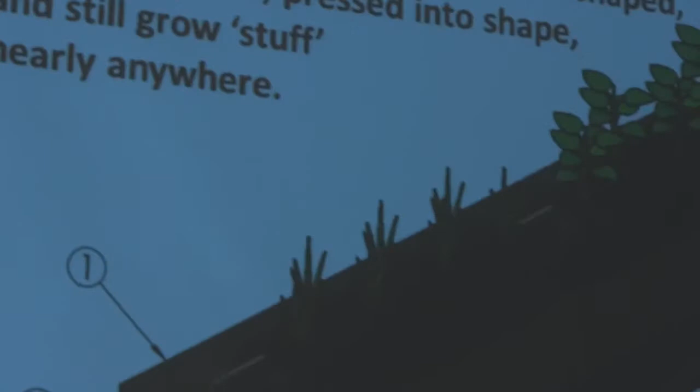This is the first flexible planter that can be shaped, kicked, prodded, pressed into shape, and still grow stuff nearly anywhere. And I mean anywhere, as long as there's sunshine and water and you have a good growing media, composted growing media. So these are some examples and designs, but that's what it looks like.

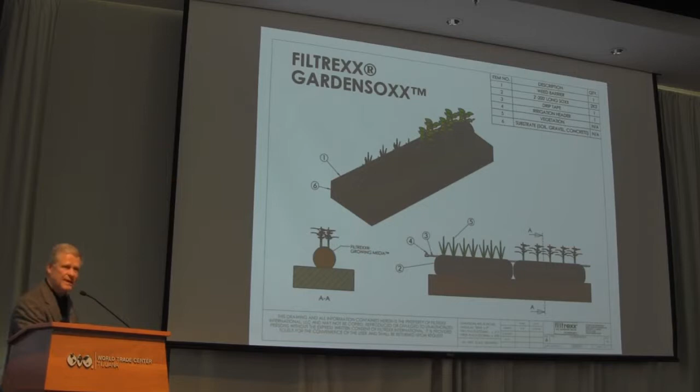It's just a sock, but it's a tighter weave sock that we fill with finer compost, half-inch minus compost, and we fill the GardenSoxx with it and plant right in the composted material. We don't add additional soil to it. We are growing truly in half-inch minus compost.

Anyone can do it. This is the garden girl out of Cleveland, Ohio. If you go online, you can Google her name, the garden girl, and she has videos of her setting up urban gardens with these socks. So here's the sock. It's simply a containment system, but it has some unique properties.

We take the growing media, like you have here in Tijuana, and the major advantages are we can set up a garden in socks within 30 minutes, a half hour, very quick. No tools are needed. There are no weeds because you kill the weeds when you composted the material. If you compost correctly, you destroy weed seeds and you destroy pathogens, organisms that will kill the plant. So we control those through composting, put it in the sock, and it lowers the maintenance required.

You use locally produced compost. Like I said, we are not a compost producer. If you're going to do garden socks in Tijuana, you use Tijuana compost, not compost from somewhere else. You reduce disease, and believe it or not, the handicapped and elderly have access, and we'll show you some examples of how easy it is for them, as well as children.

So here's some examples of sock right here, just laying it out. And here's a pallet. We usually put about 2 to 3 feet because compost is pretty heavy. So if you make it bigger than that, it's hard to carry. So you don't want it to be difficult to carry, so you make them smaller. And we stack them. So here they are in a wheelbarrow.

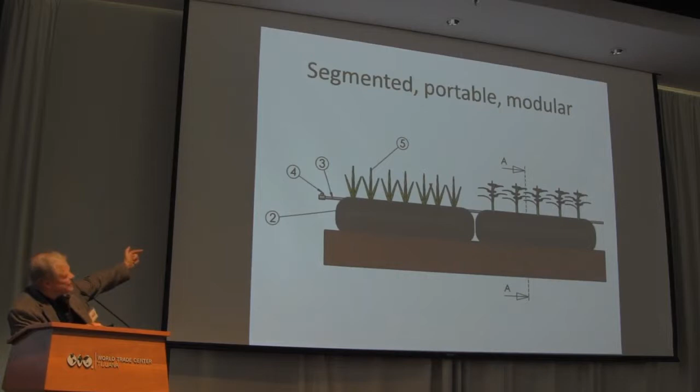I said they're segmented, and you can see the drip tape right to the top. We can put drip tape in there and set it up on a timer, and it'll get irrigated on a little timer, just a source of water. So here it is in a greenhouse or a hoop house structure.

Here's some more, see the drip tape right there? There's the drip tapes there. Here's some more examples of layouts in hoop houses for organic production. Here's direct seeded lettuce.

Food safety and quality. Just that fabric with the strawberries, they can't get any disease organism on because they're laying right on the fabric to actually stay cleaner. So it's easier to keep your produce clean.

Commercial growers. Here's 14 acres that were planted, 250,000 linear feet of garden sock, or 70 truckloads into a production system here. This was back in the eastern United States. We're just starting to introduce it into California.

I'm working with the former Secretary of Agriculture in Orange County, just north of San Diego, A.G. Kawamura, Orange County Produce, and we are going to be planting organic farms on top of the tarmac, the concrete runways from the old El Toro Marine Air Station. So we're going to take land that was not being used for anything and grow organic vegetables on it. Best food you get.

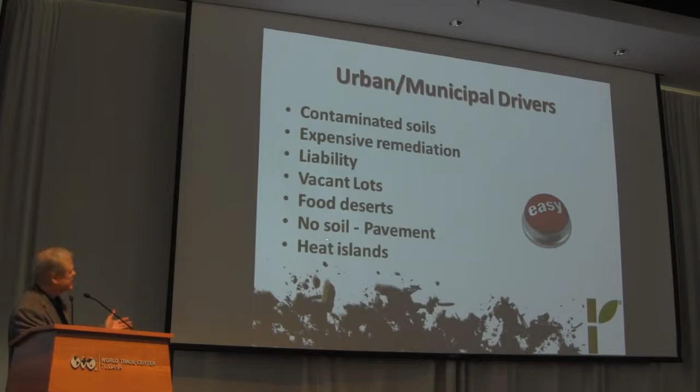Vacant lots, food deserts, places where there just isn't available food - you can grow it there. No soil needed, grow right on the pavement. And heat islands - by growing on pavement, you actually cool the entire environment.

Here's an example of urban gardeners coping with contamination. These are some of the contaminants you will find in urban environments that you have to deal with. We provide an easy fix for that - we can separate, put plastic on top of that contaminated soil and grow a garden right on top of it.

So here's an example. This is a typical building cleared for a community garden. And typically, if it does not work, it is too much work, meaning people just give up and stop gardening. You've got to keep it easy. This soil is bad quality, it did not work, so people will typically just give up on gardening and say it's too much work.

So you can lay it right here. This guy just laid it right on his grass lawn and watered it with a watering can.

Here's different communities working together, putting in community gardens. We have the Filtrexx Foundation that does nonprofit work with communities, low-income communities, to help them establish community gardens to feed people that are in need of assistance with their food bill. Here's a Somali Bantu community in Syracuse, New York, and they just put in traditional rows in that case. But this is what a typical garden would look like with the different crops.

And here's the big point - it's easy. That's what we want, we want easy. Local food, the triple play: it's locally produced, it's safer, you know where it comes from, it's organic, and it's more nutritional. USDA showed food grown in the Filtrexx system had 40 to 50% more food value than in conventional soils. Why? The organic matter feeds that plant much more effectively than just any soil that we've just dug up.

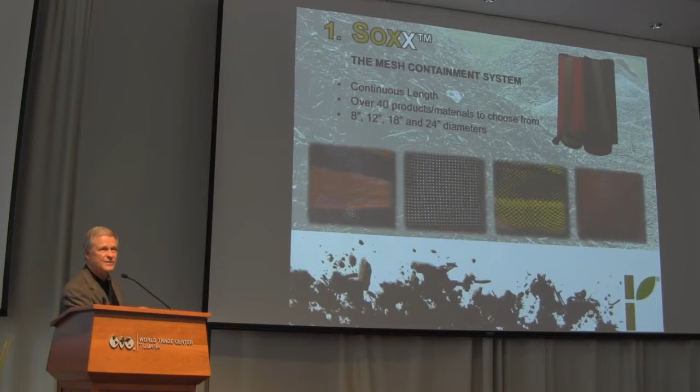It's all natural, very good at filtering polluted water, just like nature, and highly reliable. And now you can stay compliant with all the regulations. So these are some of the organizations that support the use of compost for stormwater pollution control.

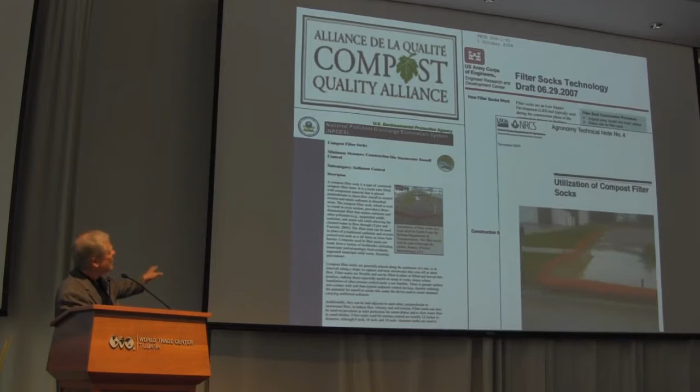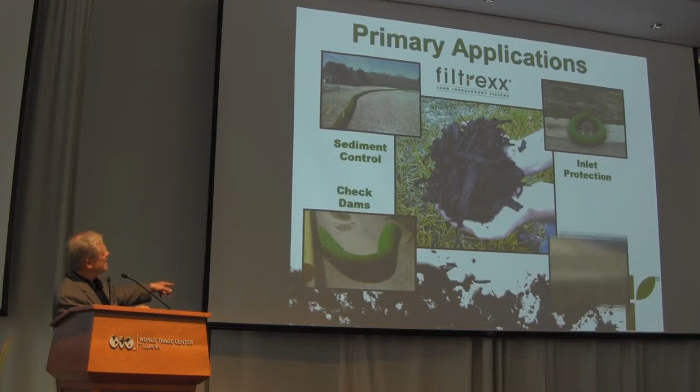The primary applications of this filter media, the compost, are perimeter control for sediment, inlet protection, check dams, and slope interruption for slowing the water down as it comes down the slope.

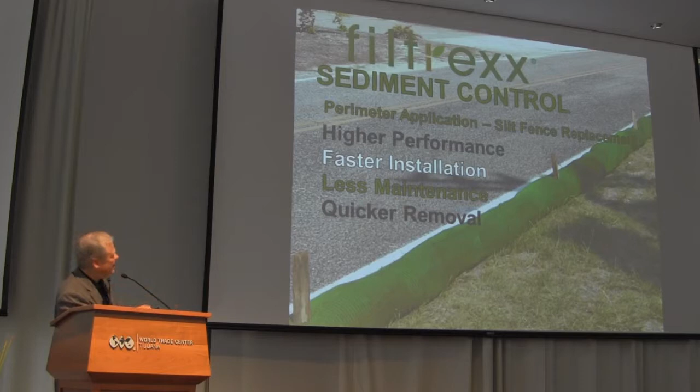So here's the sediment control for perimeter. This is what you'll see, the green sock in California. Higher performance, faster installation, less maintenance, and quicker removal than silt fence. Here's another example of it.

Here are surface applications. Notice this is on asphalt. You can do it on soil, concrete, asphalt, grass, tree, and root zones. It's so heavy that it just flattens out and filters that water without the water running underneath it, which is what will happen with a lighter product.

Here it is, high flow rate. In this case, you want the water to go there, but you want the contaminants to stay outside. You do not want to block that inlet. That inlet was put there for a reason, to get the water off the street or the parking lot.

If you block it with like a straw wattle, what will happen is you'll create flooding out here. Now what do you have? You have a more dangerous situation of hydroplaning and cars getting out of control. So you want the water there, and the sediment and contaminants on the outside. The mulch filter sock allows the water to go where it wants to and keeps the contaminant in the sock.

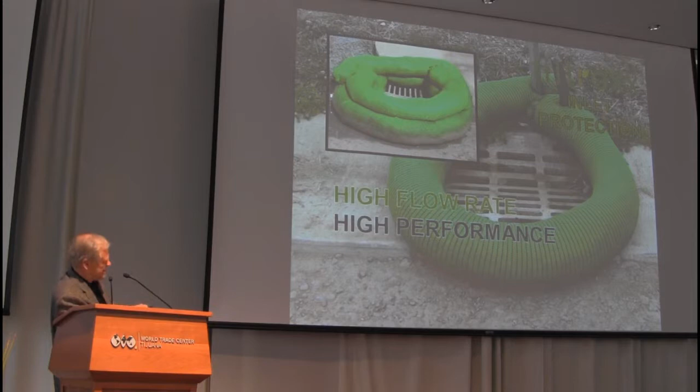Here's double stacking to get more capacity. You can see the sediment right there. Here's another one, over too.

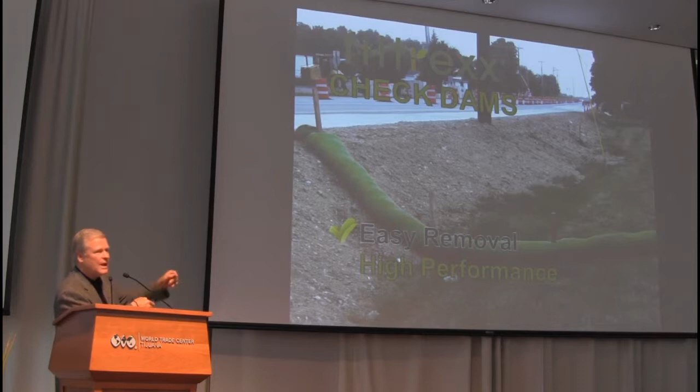Here it is as a check dam to filter the water as it goes down the channel. It's easy removal. You can just cut the sock and spread the landscape mulch after you're done, and dispose of the sock. Or you can go with a biodegradable cotton sock and use that, leave it there, and let it decompose. And it's high performance.

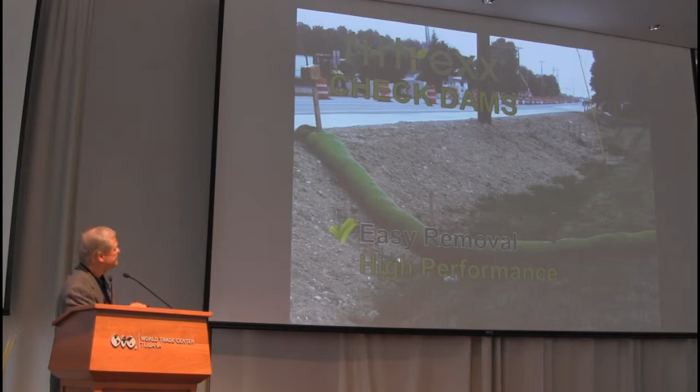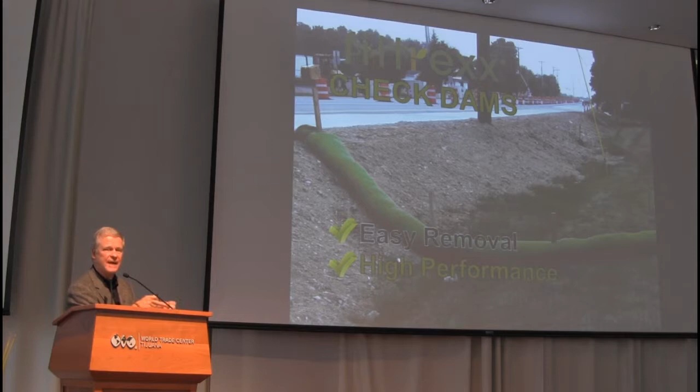A compost sock, in every test I have seen, will outperform any other sediment control best management practice that we've seen. That's through studies done by San Diego State University, as well as US EPA and the USDA. All of them confirm compost is the number one control for sediment.

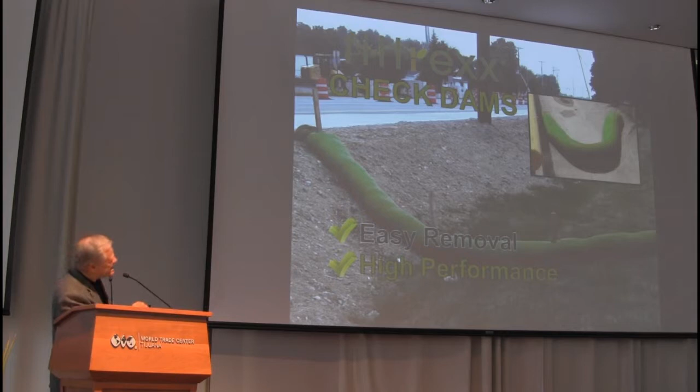And yet, do you see anybody using it? Not really. Amazing, isn't it? So there's an example of it, concrete and asphalt.

Sediment traps, I use these very effectively. When you see these, we just stack them up because the more water you have to filter, the larger the filter has to be, right? So let's look at some filters.

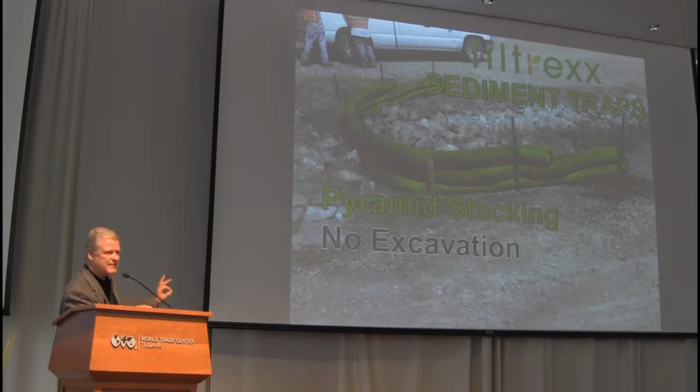You can pyramid stack them, three, two, one, just like a pyramid. No excavation, just lay them down. They're heavy, we'll stake them into the ground, but other than that, you don't have to excavate the soil. Here's one 42 inches high.

This is one I built in Carmel in San Diego County. That was after 2 storm events. That's 3 feet of sediment hitting a 4-foot pyramid stack. And what's important is maintenance. After you get that much sediment trapped, you've got to get rid of it or it'll just keep coming over. So you've got to go back in there and excavate that.

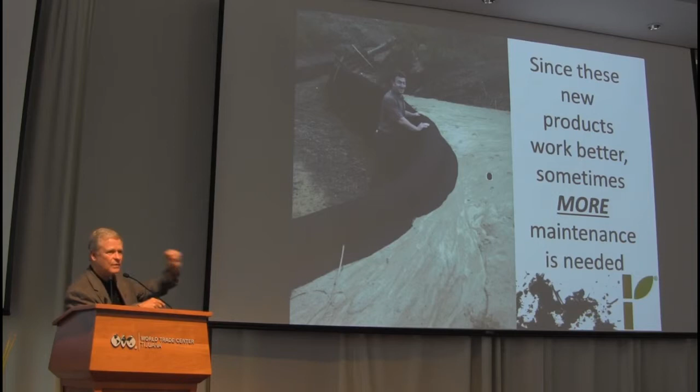You do have to maintain your sediment control devices. They just don't put them in and then walk away. You don't leave them there without maintenance. So make sure you get that out so that when the next storm comes, it can continue to trap that sediment.

How's that for a sediment trap? That's back east where it rains 3 to 4 times more than here in California and Mexico, Tijuana. So they just build the large ones there for large amounts of water.

Slope interruption, less undermining, going under the sock, and no trenching required. You don't have to dig them in because they'll lay and flatten out. And here it is on the slopes.

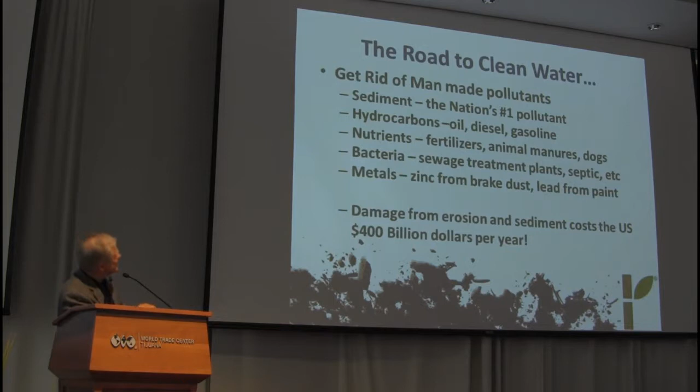And the road to clean water gets rid of man-made pollutants. Sediment is the nation's number one pollutant. Why is that? It's just soil. What's wrong with soil floating around in the water?

Here's the lesson: that sediment, that loose soil, is charged electrically, meaning every contaminant, whether it's copper from your brake pads, will attach to the sediment. So if you trap the sediment, you trap a lot of pollutants floating around in a rainstorm, a rain event. Sediment carries with it heavy metals, bacteria, nutrients, all kinds of things that will attach to it. So if you trap the sediment, you clean up your water, and that's what we do inside the sock.

So we can trap things like hydrocarbons, oil, diesel, and gas. Hydrocarbons, extremely effective. You can get 99% removal of diesel just from filtering it through compost and mulch. And what's even more interesting is the compost and mulch will deteriorate and degrade the hydrocarbons into CO2 and water. The organisms that you use to make compost are the same organisms that eat diesel, oil, and gasoline. They use it as a food source.

Nutrients, bacteria, metals, heavy metals, a big one, zinc and copper from brake pads, lead from paint. Damage from erosion and sediment control costs just in the United States $400 billion a year. You think it's worth paying attention to? Invisible pollutants, the ones you don't see, like the heavy metals and the nutrients.

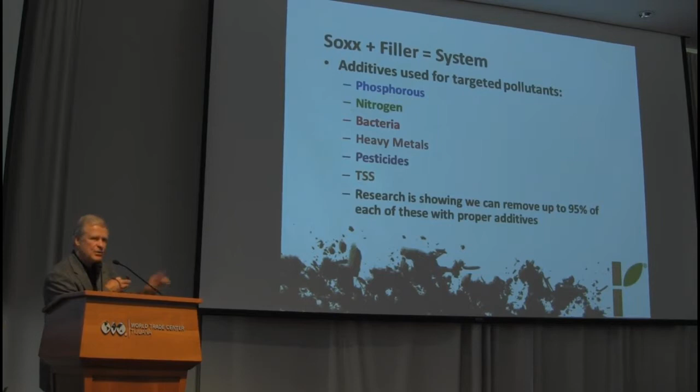Here's one right there, an oil slick. Many rivers have leading pollutants as hydrocarbons, oil, diesel, and gas coming from cars. So we can add to the mulch natural adsorbents that increase the ability of the filter medium to chemically grab hold of the contaminants and hold them inside the sock. So we'll add things to it.

Let me show you some data. We call the sock, when we add things to it, an enviro sock. And what it does is all natural additives. We use it for post-construction applications, municipalities, industrial sites, coastal areas, agriculture, and many more.

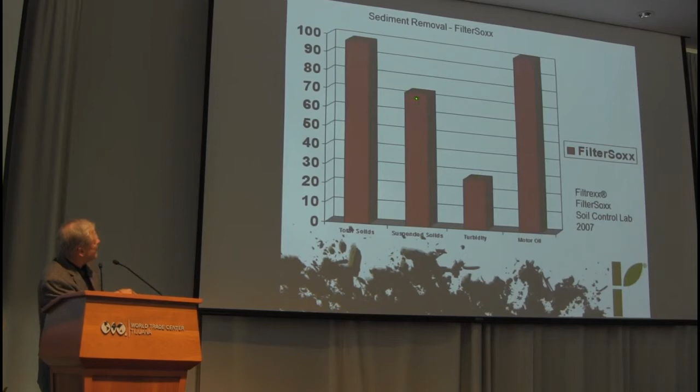Here's the pollutant removal using enviro socks. Total suspended solids, 80%. Turbidity, the cloudiness in the water, 63% reduction. Total nitrogen, 35% reduction. Ammoniacal nitrogen, 35%. Nitrate nitrogen, 25% reduction. Total phosphorus, 60%. Phosphorus is what turns the water green with algae, because the algae loves phosphorus. Unfortunately, it's too often in our water from fertilizers and what have you.

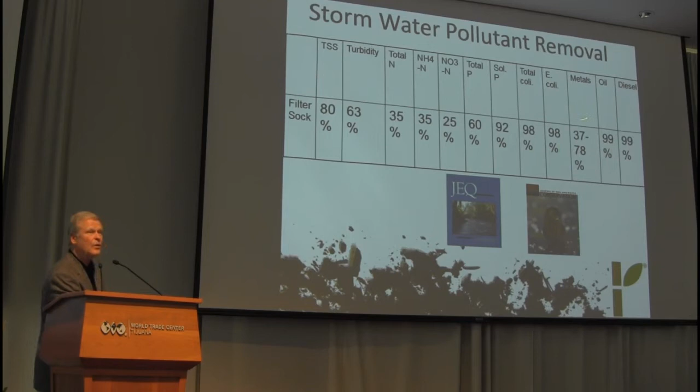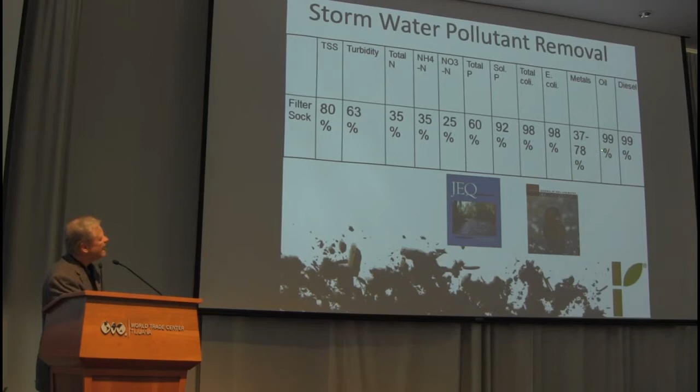Here's total coliform bacteria, 98%. E. coli from livestock or from human waste, 98% reduction using a compost sock. Metals, 37 to 78% depending on the metal. Oil, 99%, diesel, 99%. Do you think we should be using compost to clean up our water? These are the different applications: inlet protection, highways, check dams, channels, and it comes pelletized. You can fit it to whatever.

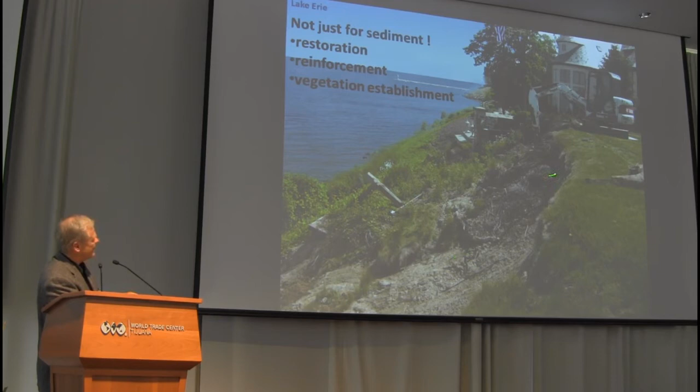The last segment, I'll leave you with, is we can build things with compost socks using a growing media. So we're going to look at places where we've lost the soil. Right here, that whole thing just slipped down the hill. What are you going to do? How are you going to get that to stabilize and keep it from ending up in this lake?

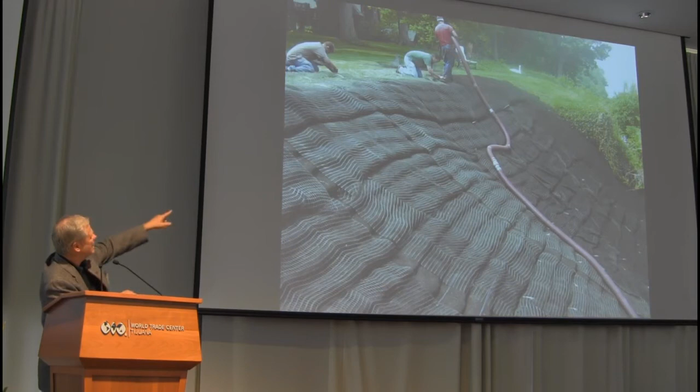Well, we can come along and stack the socks and wrap them in a geogrid or geotextile material that locks it onto the hill. This is 12 days later. 6 weeks after installation, that's what that slope looks like, with the growing media and grass seed inside the sock. The sock stabilizes the slope, then the vegetation comes and finishes it off.

We call it nature's Velcro. This is 18 months later. You don't see the sock, it just stays there. It's inert and it just disappears and becomes part of the landscape underneath.

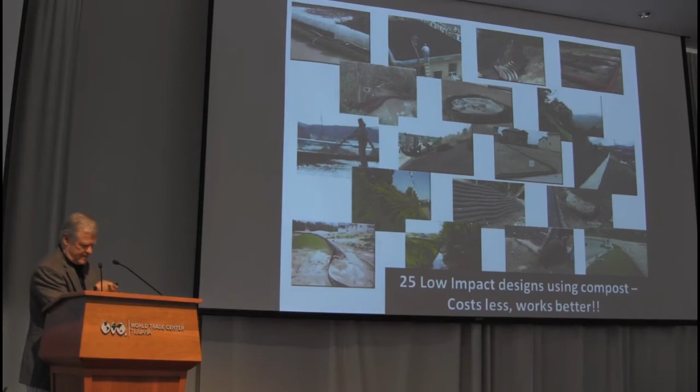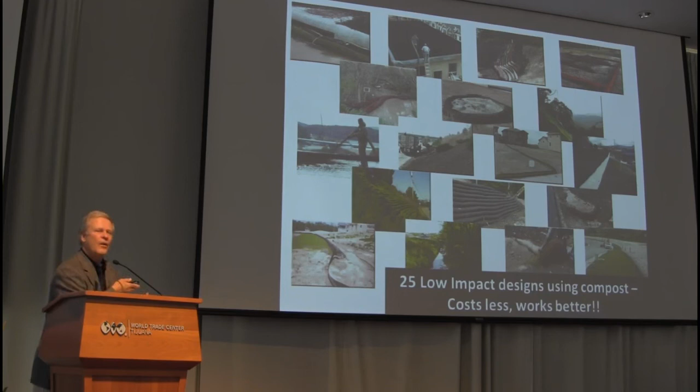We have a booklet that has 25 different designs, called the Sustainable Cycle Booklet. It's all based on compost utilization. So if someone says to you, well, we have compost, we just don't know how to use it, tell them to get a copy of this book because there are a lot of designs to solve these problems.

Filtrexx helps nature do what man cannot, in hundreds of environmental applications across a broad client base, using annually renewable, locally recycled organic materials in a patented system based on sound scientific research. Thank you so much. I'll be around afterwards if you'd like to talk.